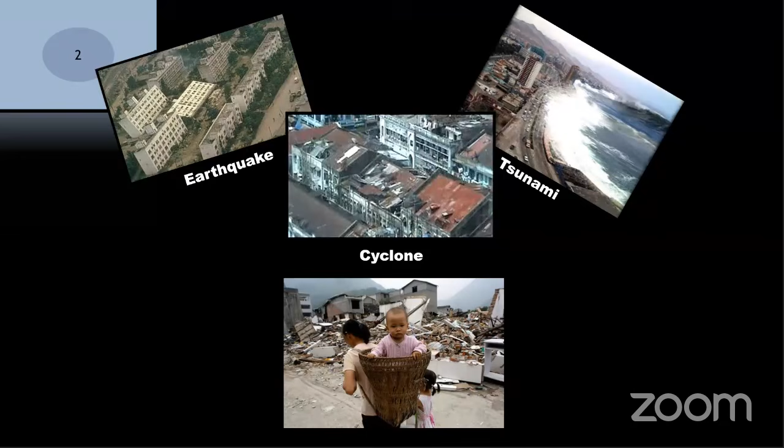With this small introduction, let me just show one small slide, the next 1 minute. In South India, many of the people wouldn't have experienced the severity of earthquake. Just watch this video, 1 minute.

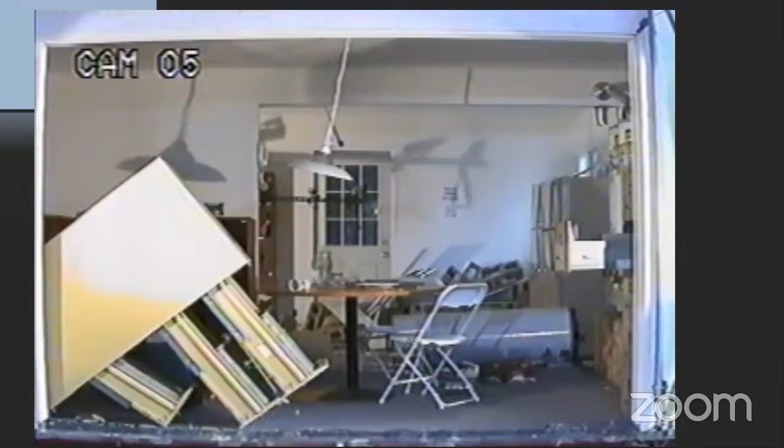This is a level of shaking the building is experiencing. What will be left out with the buildings? The building would have undergone different types of damages and failures.

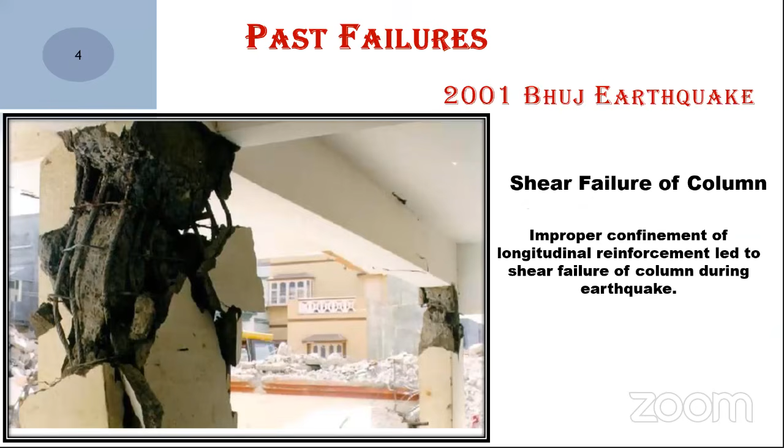Mostly when you look at the failure of columns, you can see cracking and spalling of concrete at the top and bottom. This is the shape of cracks developed due to shear, and during bending and flexural action the columns experience cracks very much perpendicular to the axis of bending. So these are the failures occurring in columns due to lateral reversal loading.

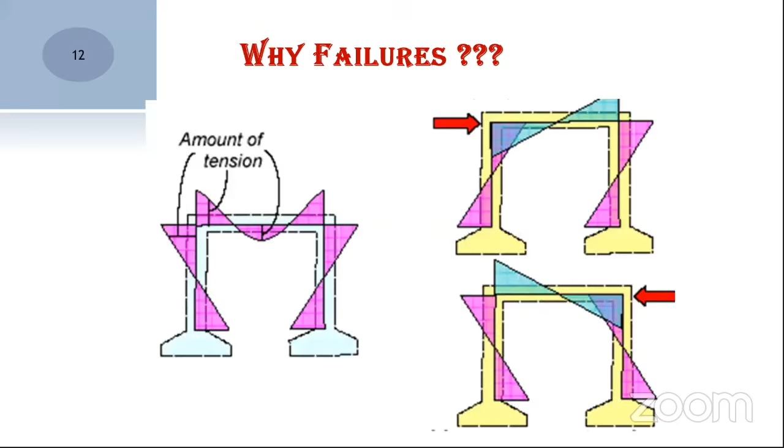This is the reason for all these major failures we are experiencing. Professor Paulay as well as Priestley together commented that all the earthquakes can be treated as experimental investigations. We generally do experiments in the laboratory, but we can treat the earthquake as a natural laboratory - our mother earth is the lab, and whatever is left out is the experimental investigation.

Based on previous earthquake investigations, Paulay and Priestley told us that it's not only the lack of strength that results in failure of structures. The structure could survive if we could maintain lower strength and allow deformation in the system. Without excessive degradation, if we permit the structure to behave in an inelastic deformation pattern, we can allow it to survive any earthquake. This is what is called ductility.

Now we come to the point: what is ductility?

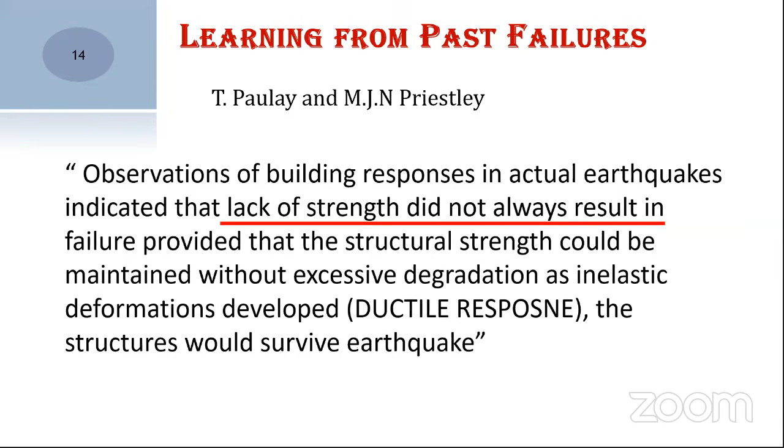Ductility is one of the major important factors affecting the performance of buildings. This is the elastic range. Beyond the elastic range, if we allow concrete structures to behave in the inelastic range, undergoing maximum deformations without losing load carrying capacity, we can make the structure perform very well. So ductility is the ability of reinforced concrete members to undergo considerable deflection prior to failure without losing their load carrying capacity. Strength should be maintained at that maximum level, and we should allow the structure to undergo maximum deformation.

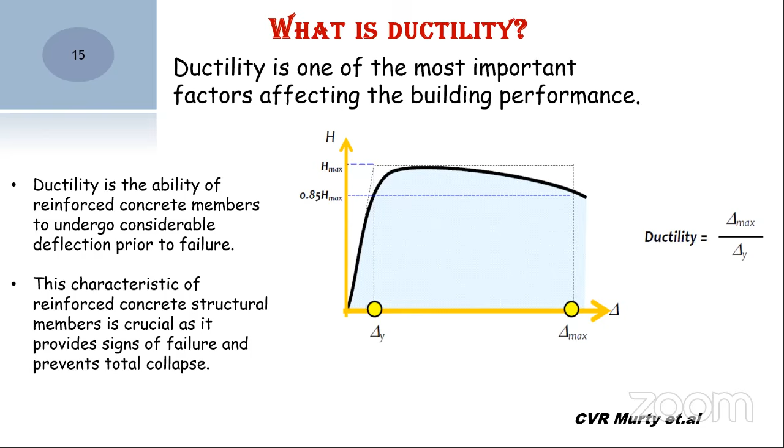What provisions can we give to the building to perform in this fashion? That is very important. So what is the importance of ductility? A ductile member can elongate more and absorb more energy. The area under the load-deflection curve is the energy absorbed by the system. If we can increase that area, it will dissipate or absorb more energy, which will avoid sudden failure and provide sufficient warning. A brittle material will fail immediately once it achieves maximum force level - sudden brittle failure with very small elongation. If we give provisions for ductile behavior, we can achieve larger deformation without losing strength, and dissipate or absorb more energy.

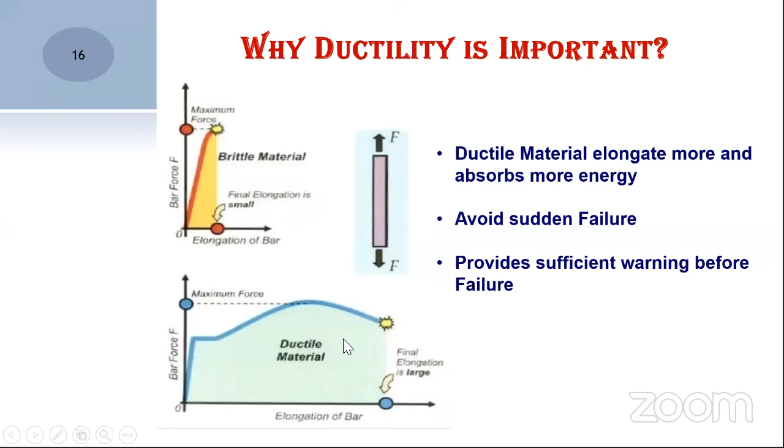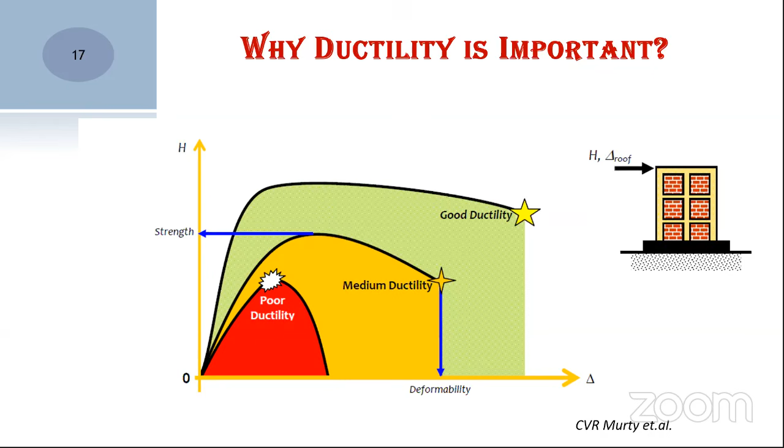All these pictures are taken from Professor Murty's document, which I'll mention at the end of my presentation. This picture shows that with poor ductility, the structure will fail with lower strength and lower deformation. With sufficient medium ductility, it provides sufficient strength as well as deformability. And with good ductility - which IS 13920 discusses how to impart - we get better performance back. That's what I told initially: what we give, we get back.

So we come to the principles of ductile design - how we can incorporate this ductile pattern into the system. We can incorporate ductility, redundancy, and overstrength into the system, thereby bringing down the demand from the elastic performance level. If we provide ductility, the structure starts performing in an inelastic manner, and we can bring down the force demand from the peak level to a lower level. If we incorporate redundancy to some extent, that brings the demand down further. By incorporating overstrength, we can bring down the design force or demand of the system even further. This has been incorporated in the code through the introduction of the response reduction factor, allowing us to design the structure with a lesser lateral load.

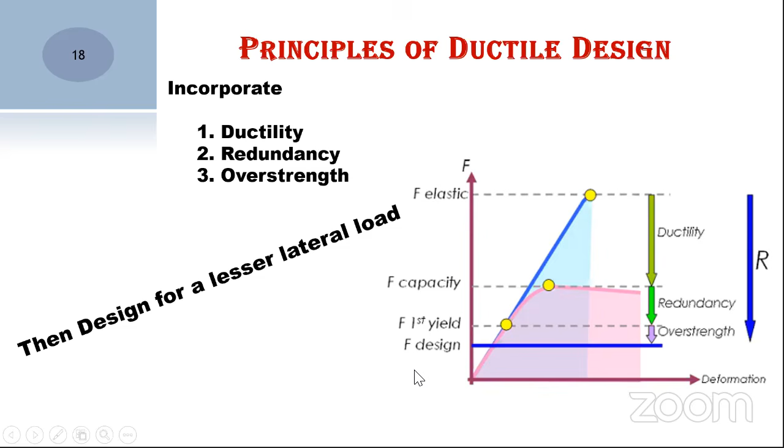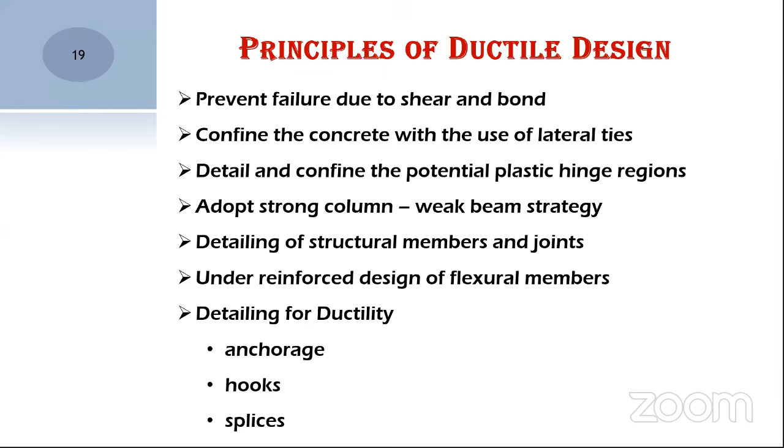What are the principles of ductile design? It will prevent failure due to shear and bond, and there is a necessity to confine the concrete using lateral ties, and to detail and confine the potential plastic hinge regions. Yesterday Professor Rupan was discussing the occurrence of plastic hinges - we should avoid plastic hinge occurrence at the roof level, among other things he explained. So we have to confine the concrete in areas where potential plastic hinges can occur, adopt the strong column-weak beam methodology, detail structural members and joints appropriately, use under-reinforced design of flexural members, and detail for ductility with proper anchorage, hooks, and splices. These are additional features requiring appropriate detailing, and these codes provide guidance for appropriate ductile detailing and design.

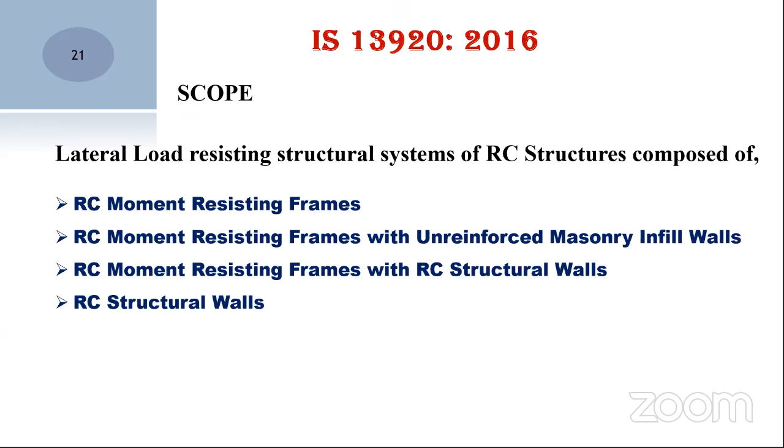Initially, in 1993, the code's title was 'ductile detailing.' The term 'design' was introduced in the 2016 edition. What is the scope of IS 13920? It covers the lateral load resisting structural system of RC structures composed of RC moment resisting frames with unreinforced masonry infill walls, as well as RC structural walls and related features. That is the scope of 13920. As for general material specifications suggested by this codal provision, the minimum concrete grade should be M20. If the height of the building is more than 15 meters in zones 3, 4, and 5, a minimum of M25 concrete has to be adopted for construction.

Maximum permissible factored axial compressive stress is limited to 0.08 FCK. Earlier it was till 0.1, now it's 0.08 FCK. Steel strength Fe 415 or lesser is much better because that will give you more ductility. If we want to go higher, we adopt Fe 500 or Fe 550, with TMT bars having an elongation limit of 14.5%.

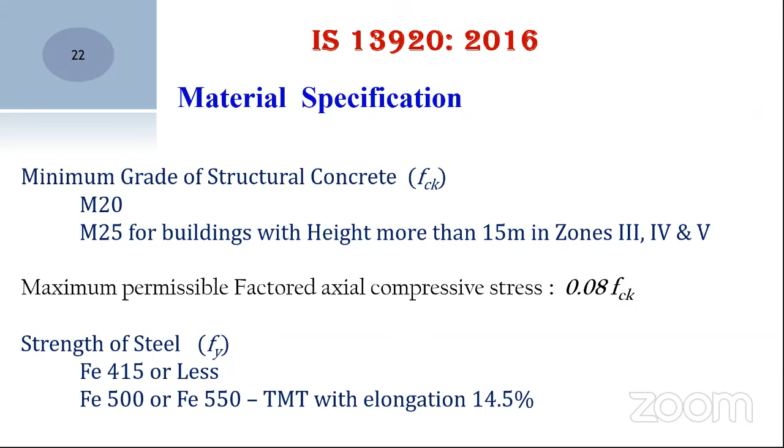Now comes the detailing part of the beams, how we can make our beam elements ductile. Look at the modes of failure—we always design or come out with a solution based on the mode of failure. First we should study the failure, then give provisions to safeguard the structure from that particular failure.

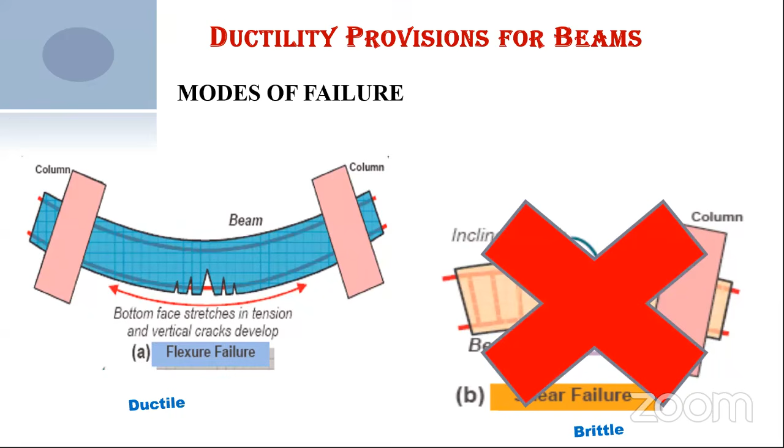The beam can undergo flexural failure as well as shear failure. When you look at the nature of failure, flexural failure is ductile and shear failure is brittle. We always prefer the ductile type of failure and try to avoid shear failure as well as brittle failure.

Now comes the ductility consideration for flexural members. We should avoid shear failure, meaning the shear strength should be much higher than the flexural strength of the member. If so, we can avoid shear failure and design the members as under-reinforced sections, which will give more ductility to the system.

Avoid bond and anchorage failure. Use closely spaced stirrups and splicing of the bars at sections of minimum tension. We should make sure that we are splicing the bars at sections with minimum tension. Detailing at the area of splicing is very important.

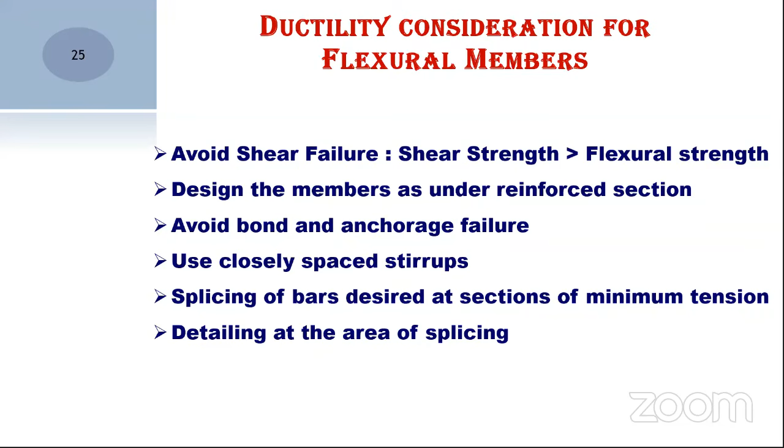Look at the provisions given by the code as per clause 6.2.3. It says that we should have a minimum diameter of the bar as 8 mm, and we should continue with minimum 2 bars at top and bottom of the beam.

Look at this provision: clause 6.2.3 says that the longitudinal steel at the bottom face of the beam, at the column-beam interface area—you know the top steel requirement for the hogging moment will be higher than the steel requirement at the bottom of the beam at this junction. It is mandatory that the area of steel at the bottom should be at least 50% of the area requirement at the top, because reversal of stresses can occur, and we need to safeguard against stress accumulation at the joint region. This is the mandatory requirement as per clause 6.2.3—at this junction, we should provide at least 50% of the top reinforcement as the bottom reinforcement.

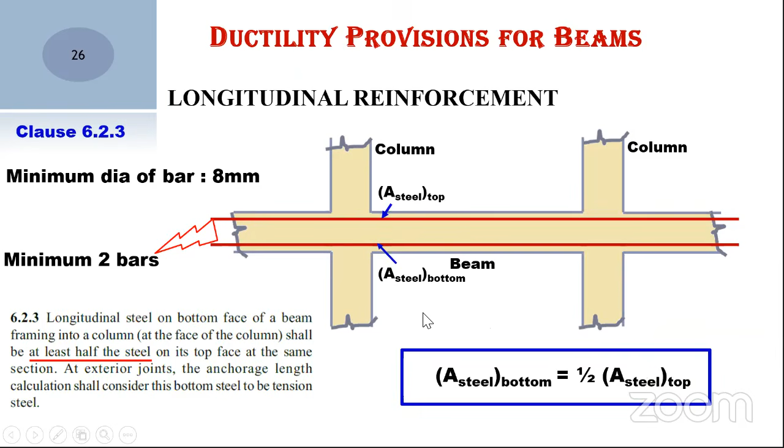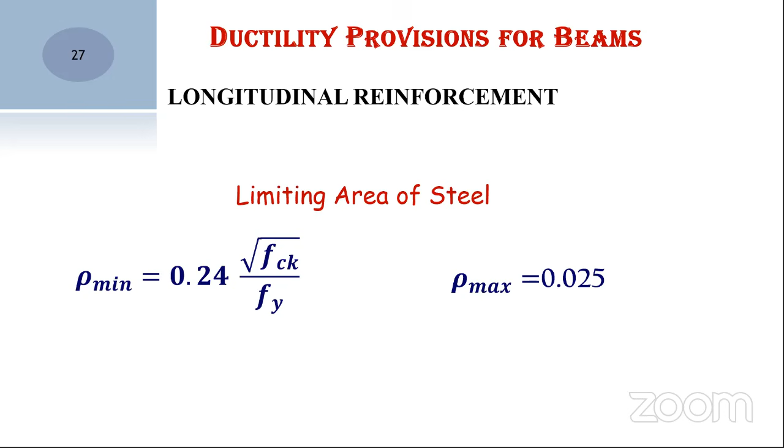This longitudinal reinforcement cannot be beyond some limit. Even though it has to be designed as an under-reinforced section, there is a limitation on the lower reinforcement given in the code as rho minimum of 0.24 root fck by Fy. Similarly, we cannot exceed the maximum reinforcement percentage of 2.5. This is given as per the codal provision in order to confine the concrete appropriately, providing ductility without being brittle, and ensuring ductile detailing as well as ductile type of failure.

Another clause, 6.2.4, mentions the requirement throughout the beam. It clearly says that the area of steel at any point along the longitudinal length of the beam, at top and bottom, should be 1/4 of the steel requirement at the top of the beam at the beam-column junction. This is very, very important—at any place along the length of the beam, the longitudinal steel at any section on top or bottom face should be at least 1/4 of the longitudinal steel provided at the top of the beam at the junction.

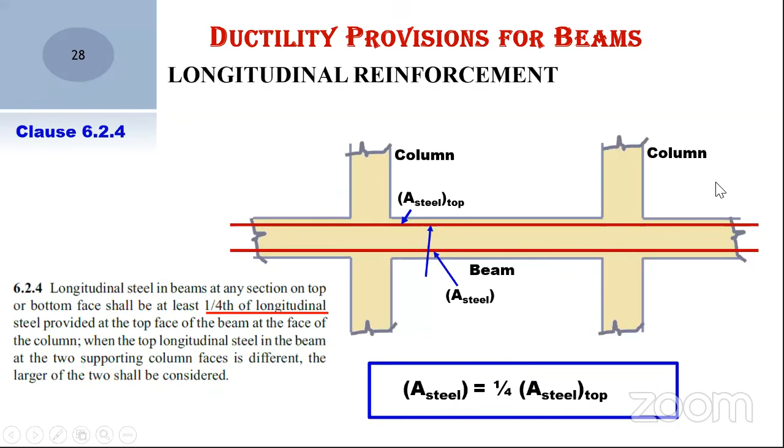This is very important to maintain integrity throughout the length of the beam, because we are providing a lot of steel at the beam-column junction on left as well as right. What about the reinforcement detailing at the middle portion of the beam? There we have to give attention and provide at least 1/4 of the steel requirement at the top of the beam, maintained throughout the length of the beam, and ensure proper anchoring.

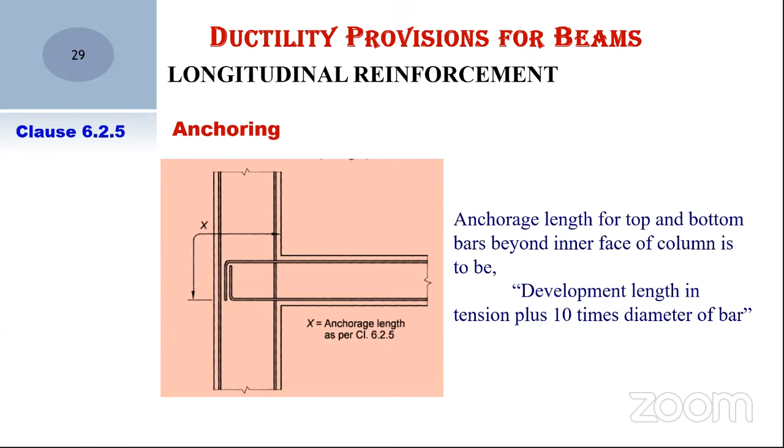We are talking about the reinforcement coming from the top and bottom of the beam, and how it has to be anchored. In the exterior beam column connection, the anchorage length should be the development length plus 10 times the diameter of the bar. As per gravity load design, we provide only development length at every connection. But in structures subject to lateral loading, we give an additional 10 times the diameter of the bar to provide proper anchorage of the reinforcement to the concrete.

The longitudinal reinforcement sometimes needs to be spliced. The methods permitted as per the code provisions are lap splicing, as well as splicing with mechanical couplers, and welded splices are also permitted.

What are the provisions given for lap splicing? The bar should not be spliced within a joint. We can have a joint at the beam column joint. Wherever connections occur, we are not supposed to splice the bar within the joint, and within 2D from the joint face. We should avoid this joint region, because there we have a lot of shear stresses coming into the joint region.

Wherever we are providing lapping, we should provide closely spaced stirrups, so that we provide confinement reinforcement at that particular area.

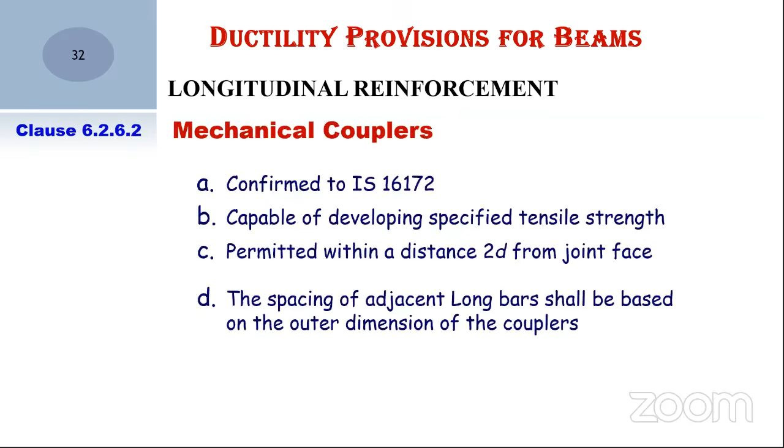The welded splice is also permitted within a distance of 2D from the joint face, and more than 50% of the bar should not be spliced at any section. These are the clauses and provisions given for splicing the longitudinal reinforcement within the beam region.

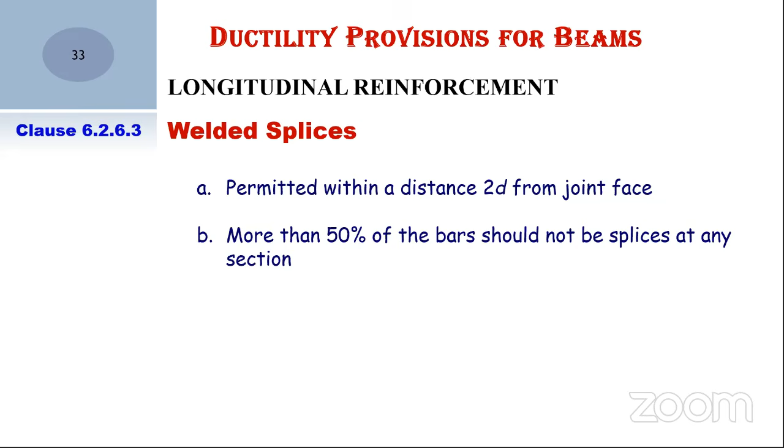This longitudinal reinforcement has to be bundled together and protected, and the interior core concrete should be confined only with the introduction of transverse reinforcement.

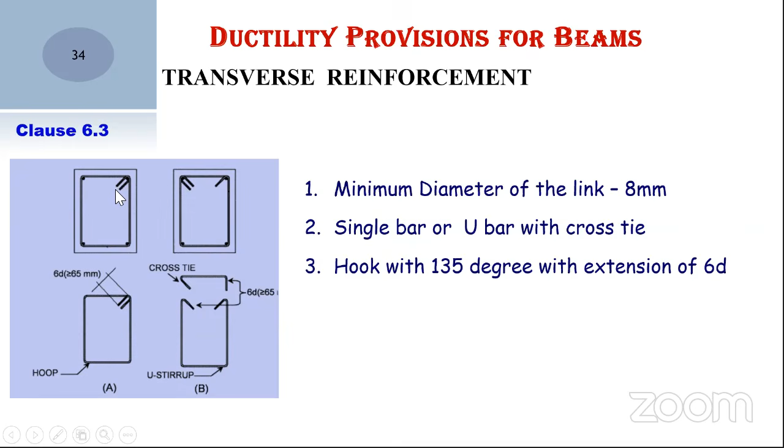Sometimes due to practical difficulties at the site, we may have to adopt a U bar with a cross tie. This hook with a 135-degree bend has an extension of 6D, which is mandatory, and the angle of bending of this hook should be 135 degrees as mentioned.

The spacing of transverse reinforcement is very much specified: near the joint region where the shear demand is more, we have to provide closely spaced stirrups, and in the intermediate area we can provide links as per the design.

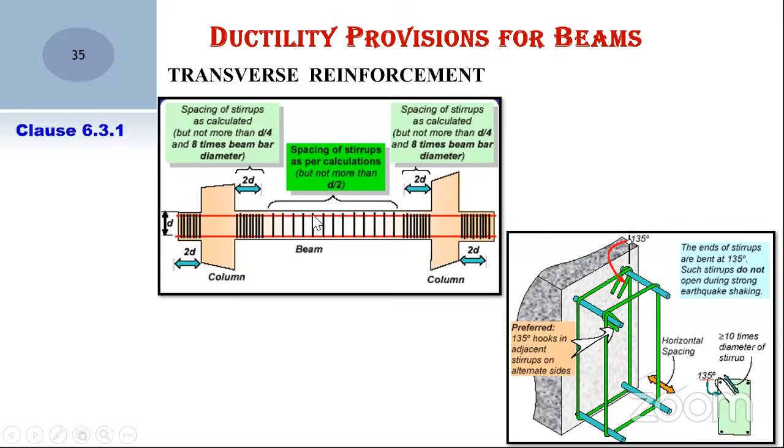And shear capacity, when we are thinking about the beam, now at this joint, beam column joint, the shear demand will be more. What is the capacity we have to arrive at? It is based on the larger of the factored shear force as per the linear analysis, and factored shear force plus the equilibrium shear force developed due to the formation of the plastic hinge. You can see here, when the beam is loaded like this, moment is getting developed at both ends, and this moment will create additional shear into the system.

You can see here we are putting a factor of 1.4, and this is the length of the beam, and this is due to axial dead load plus live gravity load. We should also incorporate the shear developed due to the moment generated out of lateral load. This shows that when the building is swaying towards the right, the nature of moment developed at the joints is like this. This has to be added along with the normal gravity load shear force, and the larger of that we have to consider and design for.

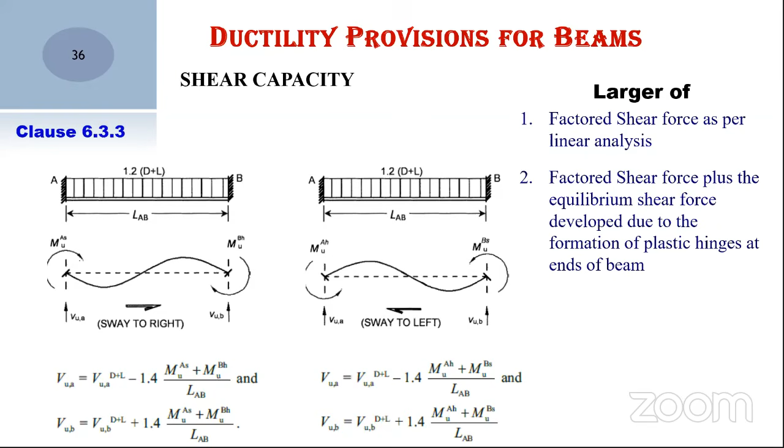Now, so this is the shear capacity. Shear capacity of the beam should always be much higher than the demand coming from the analysis; the capacity should always be more than the demand. Now I'm planning to talk about the column provisions, ductile considerations for the flexible columns.

You can see here, we should avoid long columns as well as avoid short columns, and prefer spiral confined columns. We are always sure that the spirally confined columns give much better performance and will be more ductile than tied columns. We should adopt the strong column and weak beam philosophy, and we need to provide closely spaced ties or spirals to provide more ductility to the system, and splicing of the bars is desired at mid height of the columns.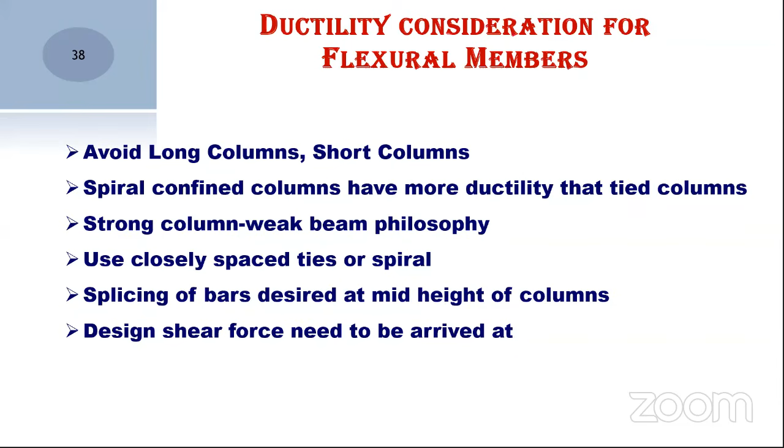In the case of columns, splicing can be permitted at the location where the bending moment is always zero, and the design shear force needs to be arrived at based on the moment as well as gravity load shear.

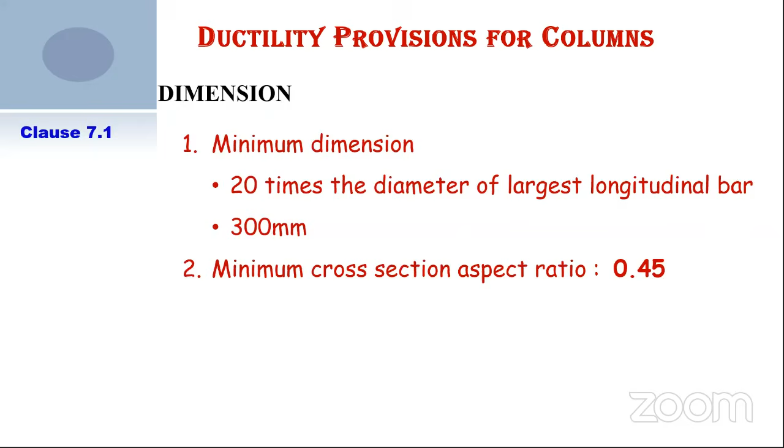The dimensional restrictions are like this: minimum dimension of the column should be 20 times the diameter of the largest longitudinal bar, or 300 mm, whichever is more, has to be adopted as the minimum dimension. We have to adopt this as per the new NBC code also; fire consideration also we have to consider. The minimum cross-sectional aspect ratio between the length and breadth of the column in plan dimension should be maintained as 0.45. This is the provision given for providing sufficient strength criteria. To satisfy the strength criteria, we should follow this minimum dimensional requirement.

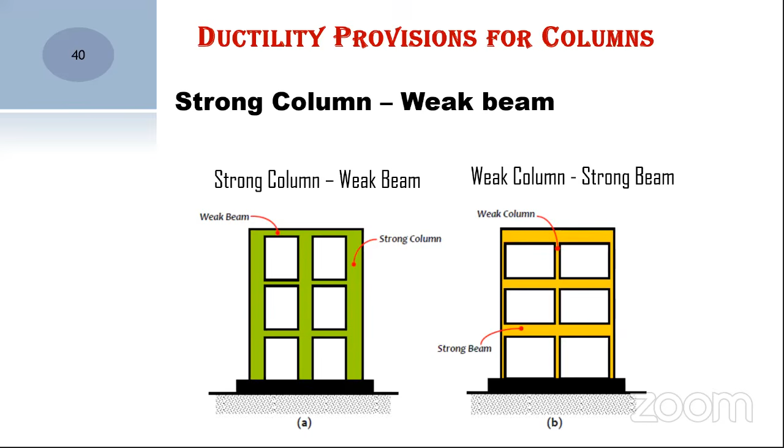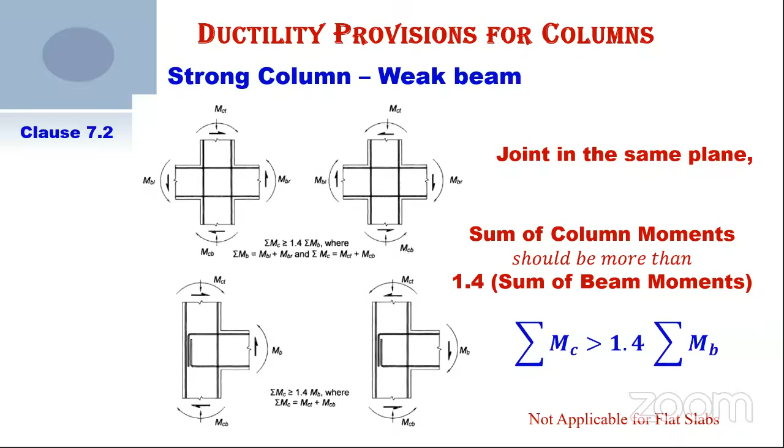So why? What is the necessity of confined lateral ties in the system? Now we were talking about strong column weak beam - we are finished with that. If we can provide columns much bigger than the beam, we can achieve the condition that the sum of column moments should be more than beam moments - that is a clear fact. Now comes the ductility part. How can we make the columns more ductile? For that, we need to confine the concrete - the confinement of the concrete.

We have to maintain the spacing of stirrups within 300 mm - that's a clause given in the code. While confining the concrete within the lateral ties and longitudinal reinforcement, that gives more ductility to the total system. Less the spacing of lateral ties, more the confinement of concrete, and more the confinement, the more ductility is yielded to the system.

So this is a small video I thought of sharing with the youngsters. Whenever you are going to the site, make sure that the 135 degree bend is incorporated in the stirrups. Without the 135 degree bend of stirrups, the purpose of providing the stirrups will not be met.

So this is just to see the failure of the column due to lack of stirrups. This is a picture which I have taken from the WHE World Housing Encyclopedia document. You can see the structure has totally failed. There are no lateral ties. The longitudinal bars have bent, buckled, failed, and there is spalling of the concrete also.

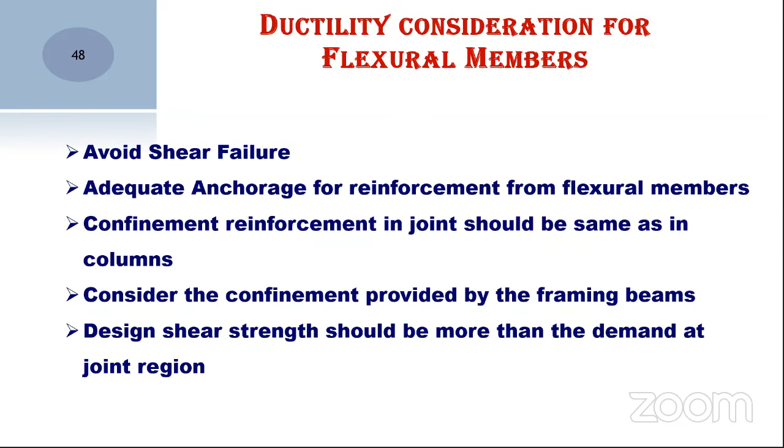Consider the confinement provided by the framing of the beam into the system. If we can give some relaxation for the spacing of the lateral ties, that has to be thought about, and the design shear strength should be more than the demand at the joint region. Otherwise, that will lead to the failure of the joint region. So these are the provisions.

This confinement length L0, vertically as well as horizontally to the beam as well as the column, should not be lesser than the larger dimension of the column. Think about the beam column dimension, consider the larger dimension, 1/6 of the column height, and 450 mm.

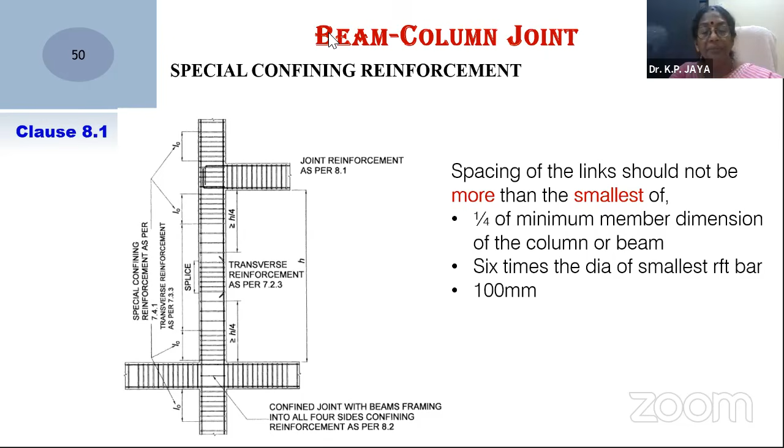So special confinement reinforcement, what should be the spacing of the links? It should not be more than the smallest, because here also we are saying that for the end length, top and bottom of the joint region, we should provide lateral ties. What should be the spacing of the lateral ties? We have to adopt the smallest among these three: 1/4 of the minimum member dimension of the column or the beam, 6 times the diameter of the smallest reinforcement bar, and 100 mm. Also, it should not be less than 75 mm, as we have described.

In so many cases, youngsters ask questions like, why did you adopt 1/4 of minimum dimension? Why 6 times diameter? Why not 4 times the diameter of the bar? At present, technically, we can say that from past experience and experimental investigation results, we have come out with these provisions and solutions. But kindly follow that.

And we were talking about what the lateral ties should be and how much the spacing should be. If we are providing a dimension where one leg is more than 300 mm, there we have to provide cross ties. All these things we are discussing like this.

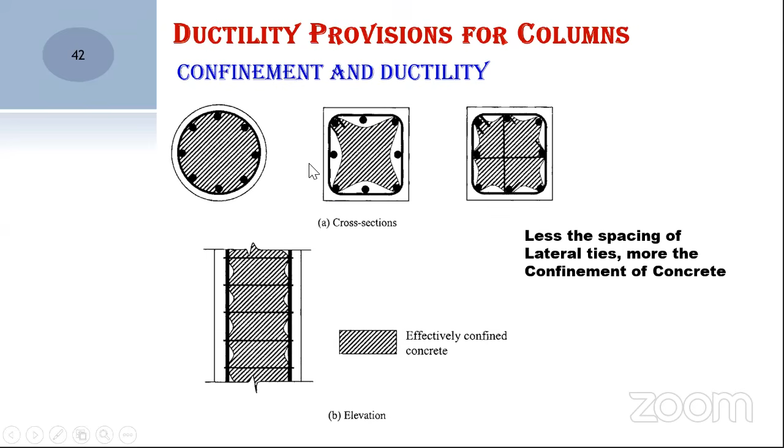When we look at this, this dimension dk will be the outer edge diameter of the bars, and Ak, when we are thinking about the area of confinement, will be within this link, outer to outer of the link. That's what it's mentioning.

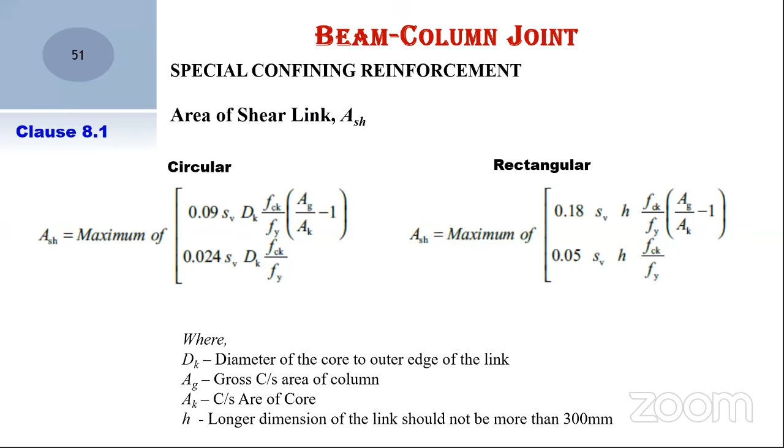So for circular columns, dk is again a function of gross cross section and confined area, and in rectangular sections it is directly proportional to H, which is the larger dimension of the horizontal link. It should not be more than 300 mm. If it is more than 300 mm, we have to cut that length by introducing a cross tie. Then the unsupported length has to be considered as H.

What is the effect of distortional shear? When you look at the beam column joint, these are the force components in the beam column joint. If the shear is acting at top and bottom like this, and this core region, you can see, this core region will be subjected to a severe shear. This is the compression zone, this is the tension zone.

You can see this diagonal will be subject to compression, this diagonal will be subject to tension. The tensile stresses will be taken care by the reinforcement, and the compressive stresses has to be taken care by the concrete area, and it will lead to the failure of the concrete joint, finally leaving failed conditions like this. This is also the external joint region.

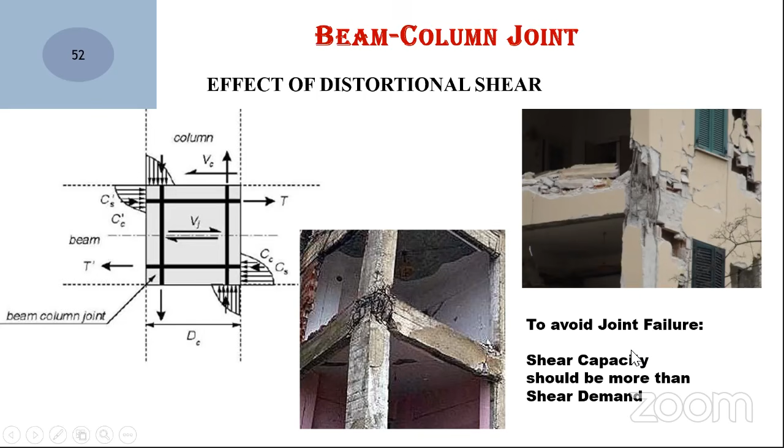To avoid this type of joint failure, we should consider that the shear capacity of the joint should be more than the demand, the shear demand at that particular joint. For that, there are a lot of provisions given in the code.

If the joint is confined by beams on all four sides, like this joint where the beams are coming from all four sides, in such case the nominal shear capacity, strength capacity, tau JC, has been calculated by this expression. This AEJ is nothing but the effective shear area of the joint, bj into wj. The clear explanation is given in the code IS13920, clause 9.1.

If the joint is confined by beams from only three sides, there is some reduction in the capacity, to 1.2, because when we have beams from all four sides, that gives more confinement to the system. That confinement reduction occurs if you are missing one beam from one side. That's why the coefficient has been reduced from 1.5 to 1.2.

Now look at the third point: the external joint beam column connection. This is the corner joint connection. In the corner joint, what is missing? There one more beam is missing. There also the factors like that are going on. This is how the capacity of the joint is calculated.

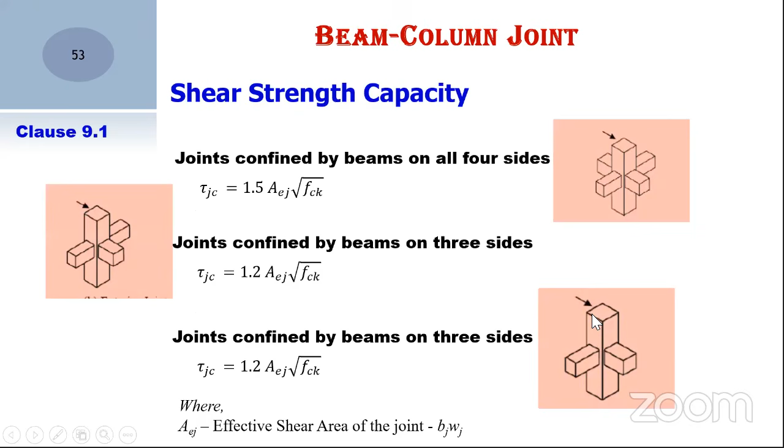This is the demand. As a summary, we can say that the capacity should always be more than the demand. This expression, tau JC, which you calculate using this expression, should always be more than the demand coming at that particular joint. This is the summary of demand and capacity of the joint region.

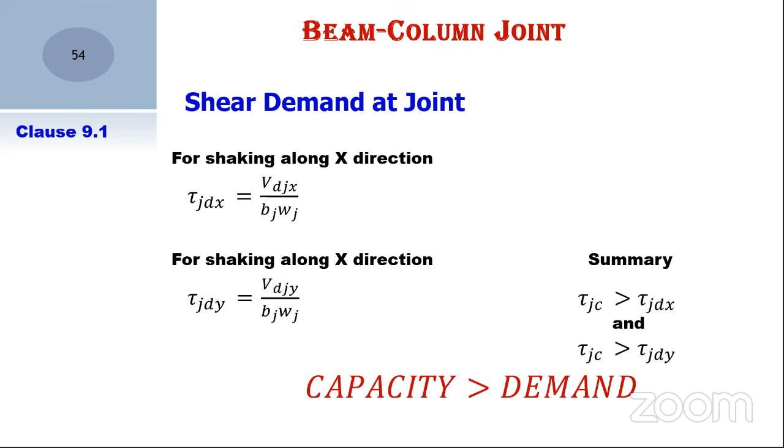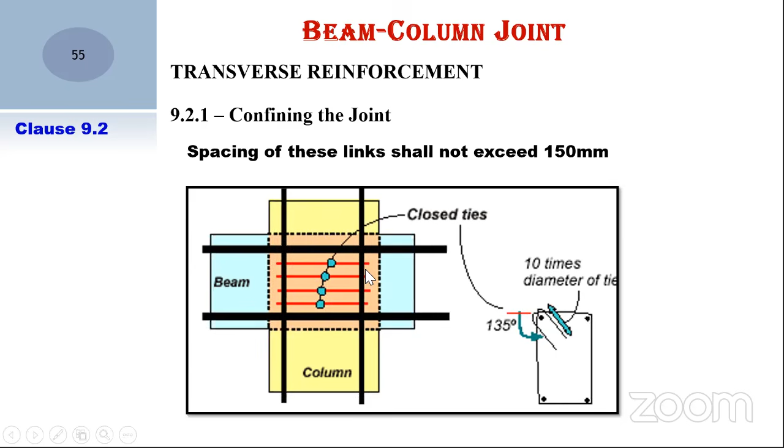So in order to satisfy that demand as well as improve the capacity of the joint, we should provide closely spaced stirrups throughout the joint region also. This is closely spaced stirrups - not 10 times, it is 6 times. This picture I took earlier.

Finally, look at the beam column joint. Everyone, all practicing engineers, complain that this area becomes totally congested - we are unable to pass the stirrups into this joint region. I have given them an idea: before putting your beam reinforcement coming from this direction, put these links down initially itself. Whenever you are putting the beam reinforcement from this direction, arrange it raising one by one and appropriately tie at appropriate locations. This is the provision we suggest.

The practicing people in the field, supervisors also, will say that it will be too much difficult to provide these closely spaced stirrups in the joint region, but we have to tell them as an engineer, we should find a solution and tell them how we can incorporate that.

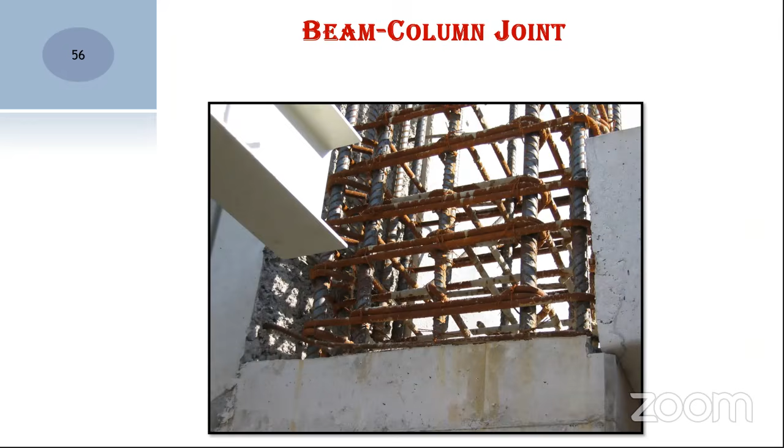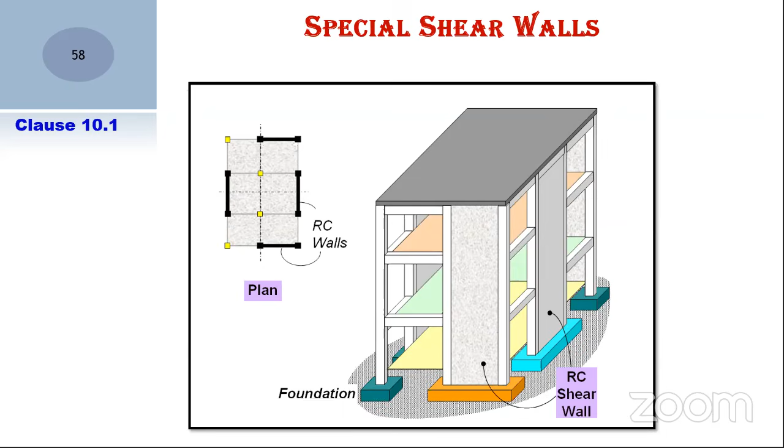This will always protect the structure from lateral force, and the shear walls will provide sufficient resistance towards the lateral load. We generally distribute the load such that gravity load is taken care of by the frame system, and the shear wall takes care of the lateral loading system. The appropriate sharing is possible with this hybrid system.

So what are the general provisions? Minimum thickness should be 150 mm, and it should be 300 mm for buildings with coupled shear walls. Minimum length to thickness ratio should be 4, and there is also a minimum thickness to length ratio. There are classifications of shear walls like squat, intermediate, and slender, depending on the height to length ratio.

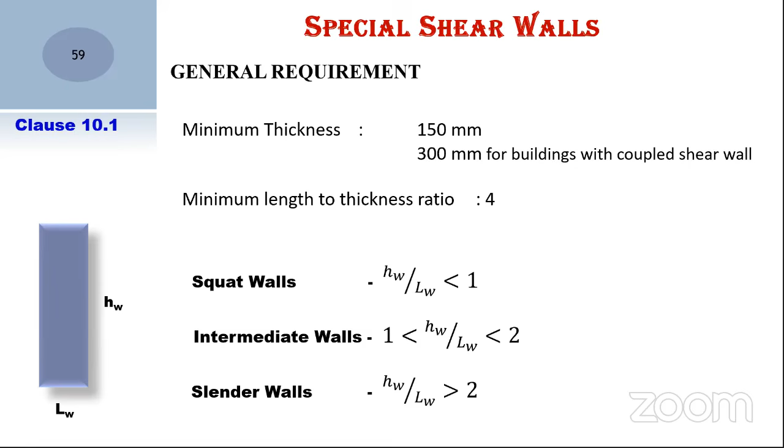If the height to length ratio is less than 1, it is called a squat shear wall. It will not become ductile, so we should not adopt such shear walls. If the H/LW ratio lies between 1 and 2, it is called intermediate. Slender shear walls will perform nicely.

We are not designing the columns to take care of torsion, so it's better to avoid that. How to avoid it? We can place the shear wall in the periphery wherever we want, thereby reducing the torsional mode in the structure. So the shear wall is a very good savior for our structures subjected to lateral load.

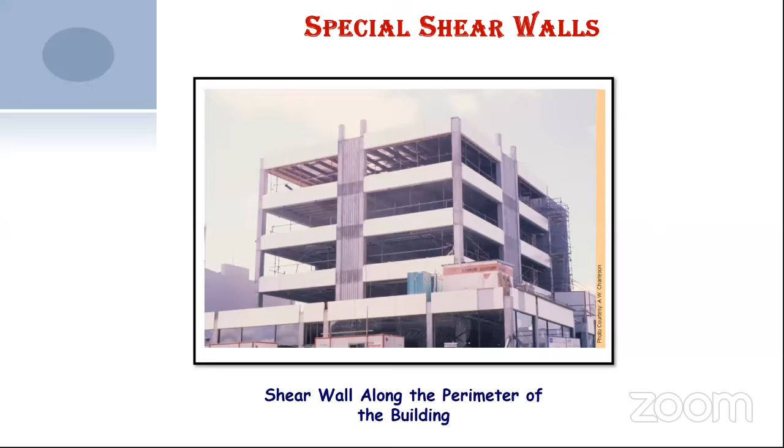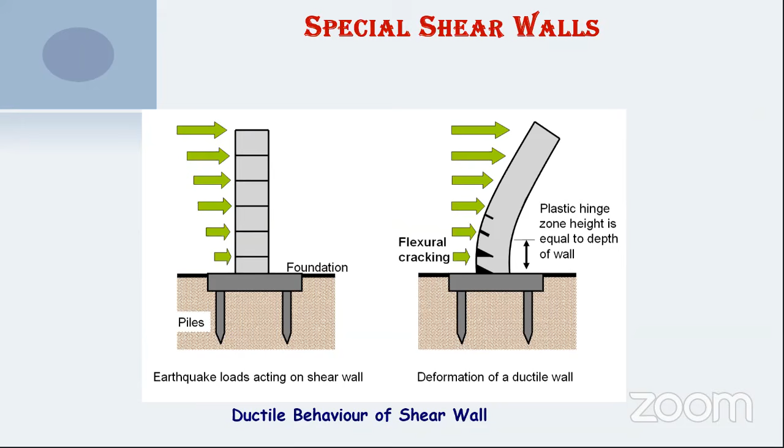What happens when the shear wall is subjected to lateral load? It will undergo flexural cracks. So the mode of failure of structural shear walls is always in the flexural mode, not the shear mode. This particular area will be under tension, and this particular area will be under compression.

So we need to provide additional consideration for the boundaries. If we can provide boundary elements, or if there is no need, we can confine the boundary area with closely spaced stirrups. Always make sure that the shear wall is not a curtain wall. The shear wall should continue till the foundation. Always the RC shear wall should start from the foundation.

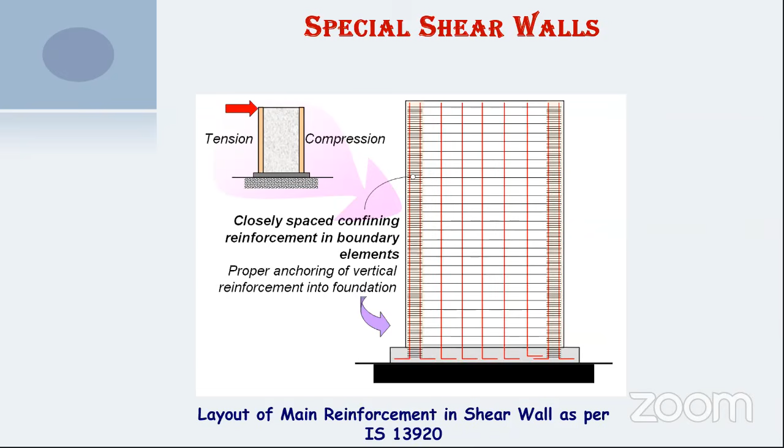Only then can we call the shear wall a shear wall. It's not like what you can call a curtain wall; it will not give appropriate results, it will not perform. So if we need to provide boundary elements, then we have to appropriately consider the boundary walls like this, and there is also a minimum reinforcement specified in shear walls.

This is given in Table 1 of IS 13920, specifying what should be the minimum reinforcement, rho V minimum and rho V net minimum for the shear wall. In order to get appropriate ductility as well as performance of the shear wall, we have to satisfy the minimum steel requirement.

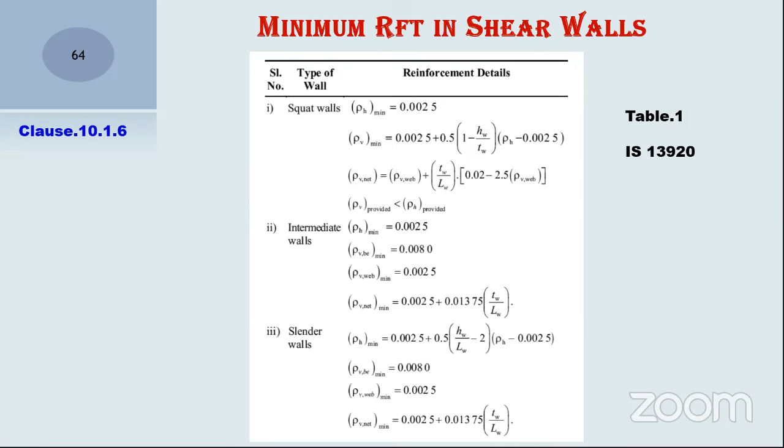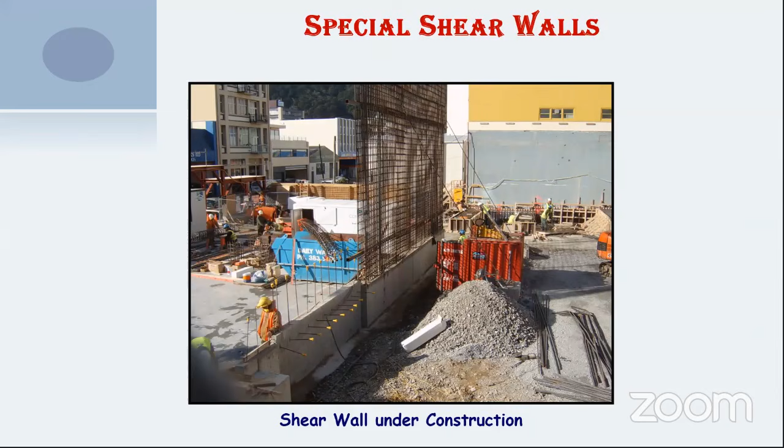So now, coming to this, I have almost covered the provisions. What are the provisions, and what is the consequence of the provisions for the beams, columns, joints, and shear walls? I think I have almost covered the provisions of IS 13920. But I want to get your attention towards what is happening in practice at the site.

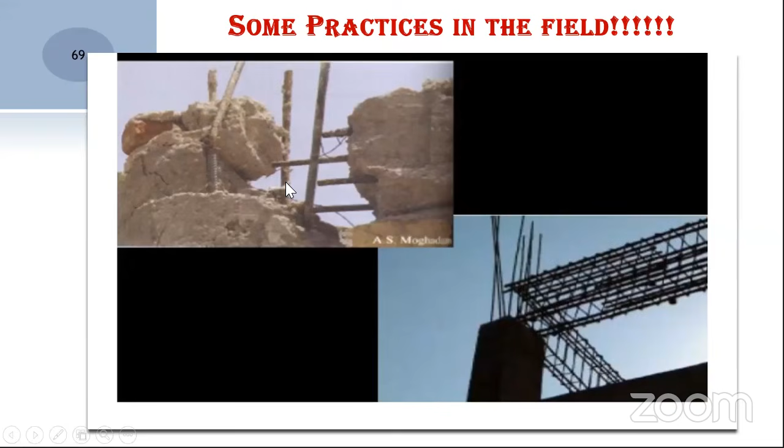Who can protect it? Even God cannot protect such type of structures.

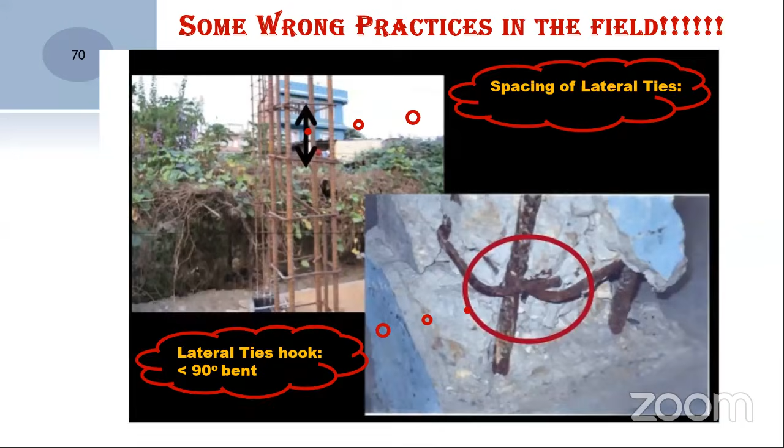Now look at this, see, we are talking a lot of things. We just see the hook dimension. Even 90 degrees is not there. The hook is not even bended with 90 degree, or after failure it would have been opened up. And this one, you just see this is a lateral space, lateral ties with spacing of lateral ties. Just see how can it confine the concrete within this area, or how can it bundle this longitudinal reinforcement. This has to be, who is responsible for all those things.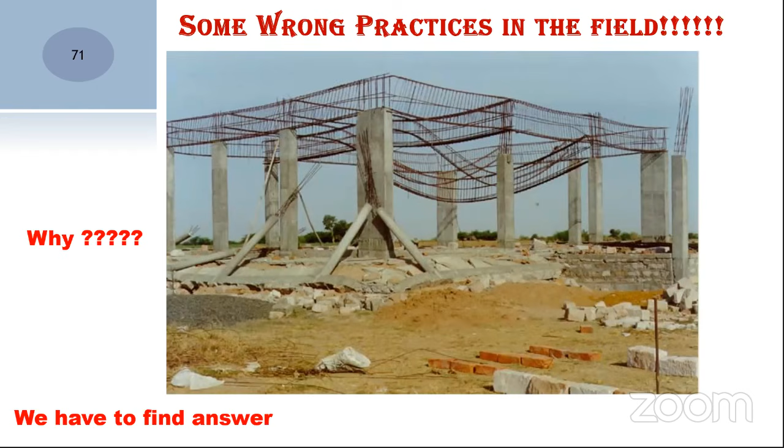And just look at this. This is the reinforcement detailing at the site. Why is it like that? We have to find an answer for all these things. But I don't think it is only of ignorance. We know, we very much know. And who is playing this?

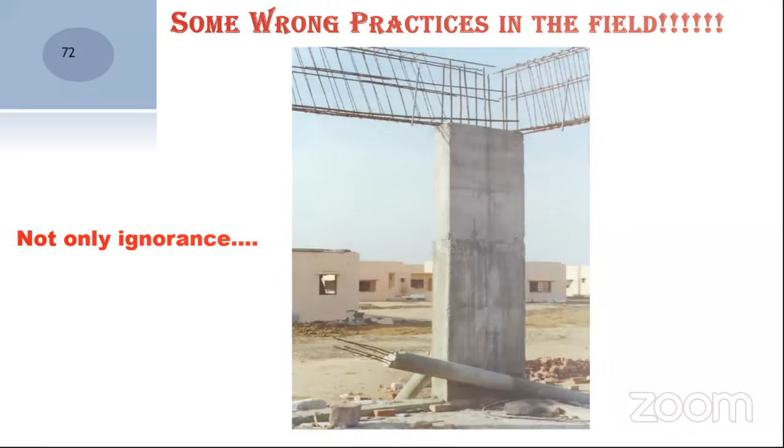And hereby I should acknowledge Professor A.S. Arya, starting from Arya, he is no more now, and Professor Jain and C.V.R. Murty for being the pioneers in introducing this field of study to the civil engineers. Earlier, earthquake was only within the seismologists. Now, these eminent people have brought this area of study to the field of civil engineering. And a very special thanks to Professor C.V.R.

Rupen and Vijay Narayanan and Vipul Mehta for developing this such a nice document, earthquake behavior of buildings, some concepts. They prepared this for the Gujarat State Disaster Management Authority. There is a very, very clear and understandable way of presentation of the matters related to earthquake engineering. And I am so proud to say that A.R. Vijay Narayanan is my own student for the UG program, PG as well as PhD. He completed with Professor. Thank you, and thank you all.